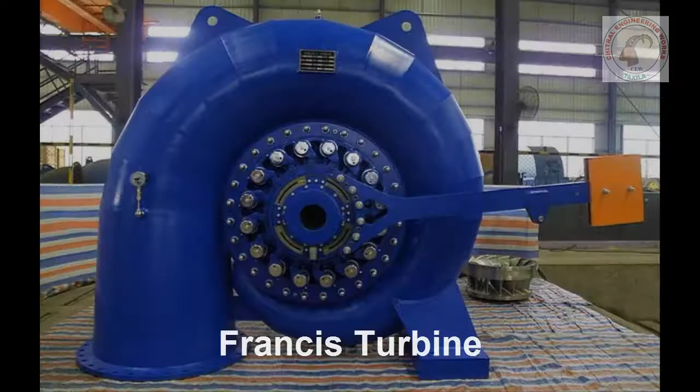Before heading towards T34, it is very important to know the history of the original Francis turbine. Initially, this turbine was invented by Mr. Jean Victor of United States in 1820s. And then the turbine was remodified by Mr. S.B. Howd in 1838. 10 years later from S.B. Howd's development, the turbine was finally developed by Mr. James B. Francis and called Francis reaction turbine. The Francis reaction turbine was considered to be a highly efficient turbine.

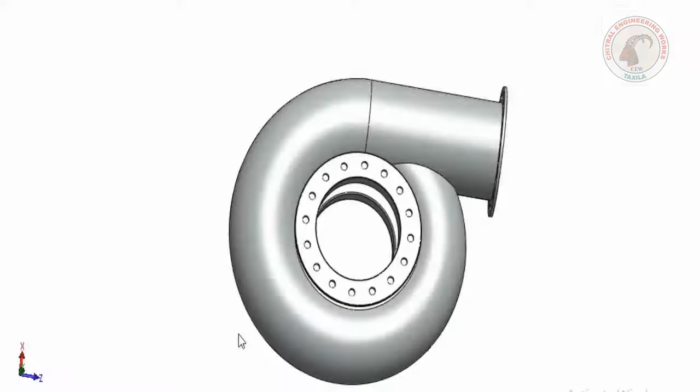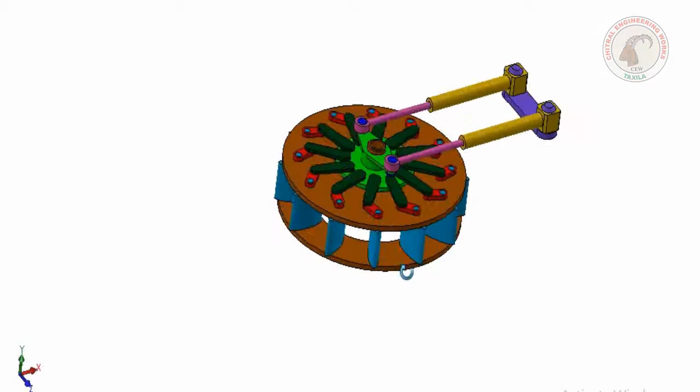But there were few difficulties in manufacturing this turbine. First of all, its spiral casing itself is very difficult and time consuming to manufacture, and of course it's expensive too. Another big problem is to repair and maintain its complicated wicket gate assembly in the remote areas where mechanical workshops are very far away from the powerhouses.

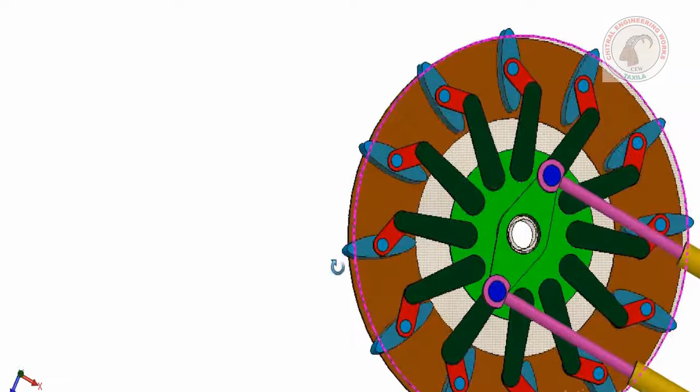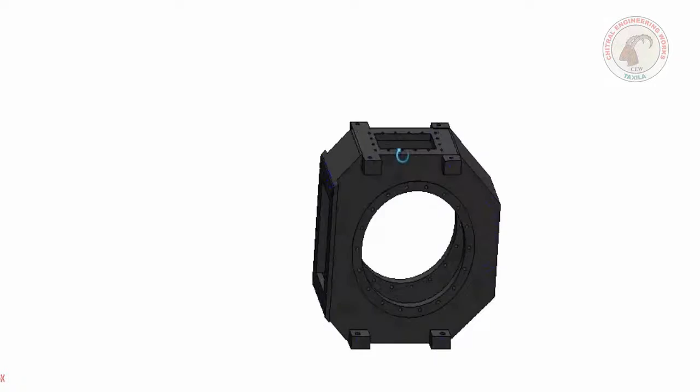To overcome these problems, Mr. Akhtar Chaudhary of Chitral Engineering Works, Taxila, Pakistan, started development of Francis reaction turbine by replacing its spiral casing with square casing, and instead of using complicated wicket gate assembly, he used fixed wicket gates and only one cross pilot to control water flow. In 2008, he succeeded to achieve 88% efficiency and named this development as T34 cross pilot reaction turbine.

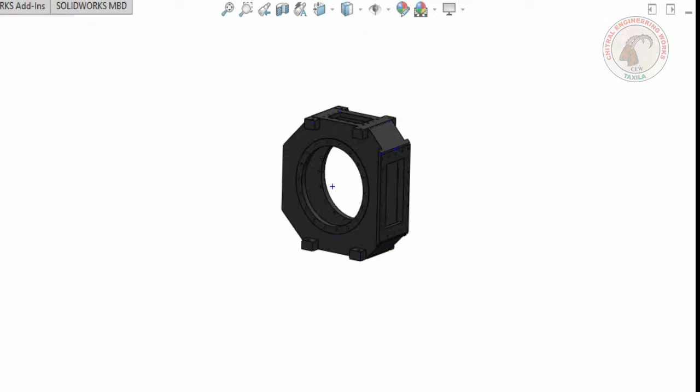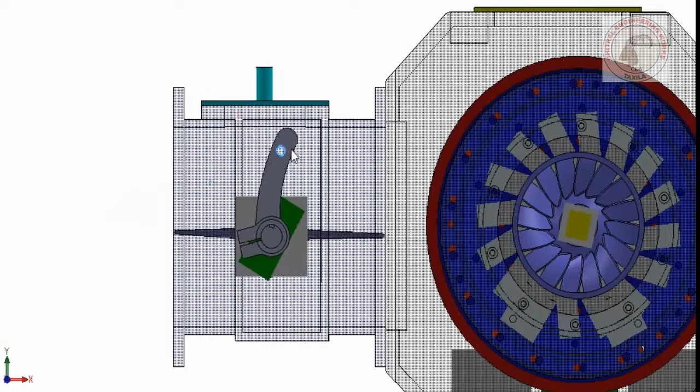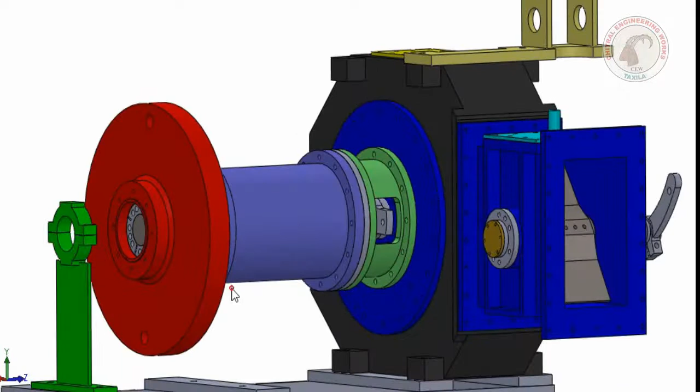This is the intake adapter, and inside the intake adapter there is a butterfly valve to control the water flow. When water passes through cross pilot and strikes the runner, it rotates in this way. The runner is coupled with the flywheel by means of this shaft. Flywheel is further aligned with generator by a universal cross shaft in a single line.

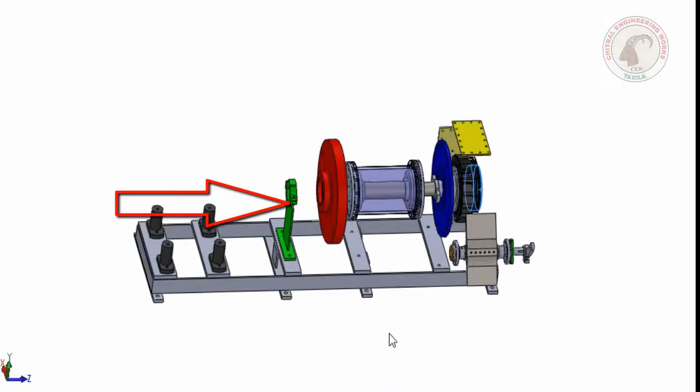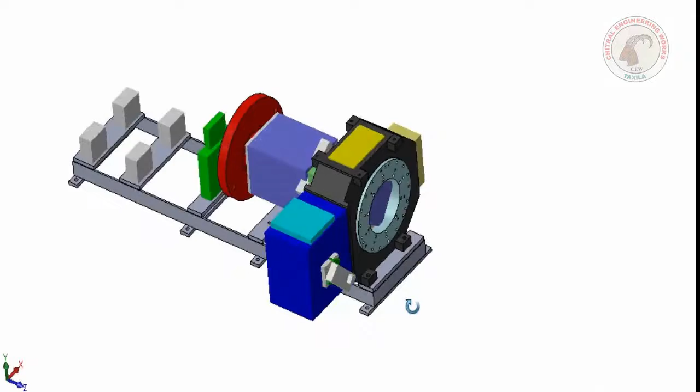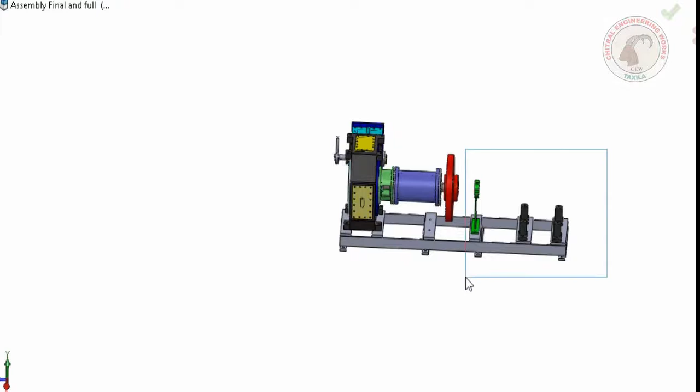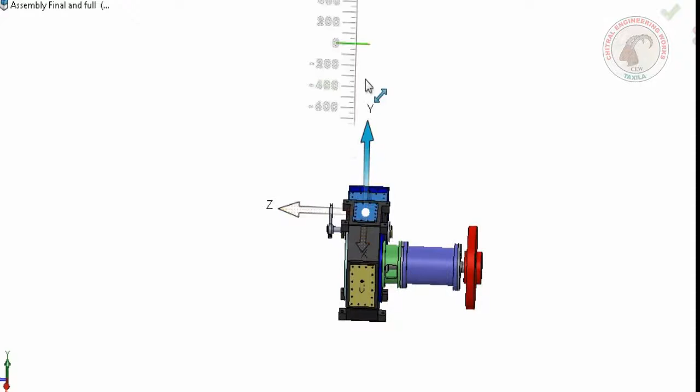These metal plates on the top of casing and intake adapter are used to remove trash. This metal plate on the back side of casing is also used to remove trash. This is the base frame of turbine. Metal plates for removing trash. Metal plates for removing trash on the back side of casing.

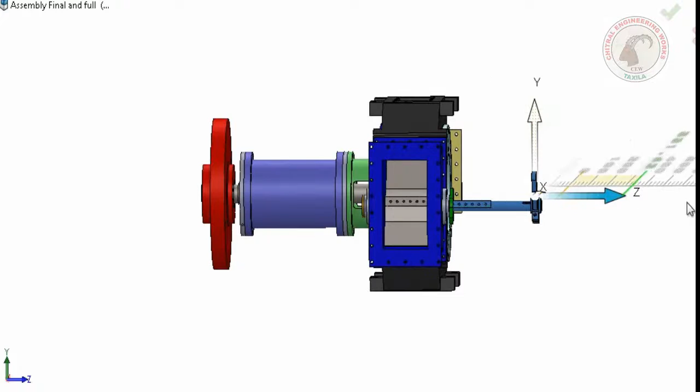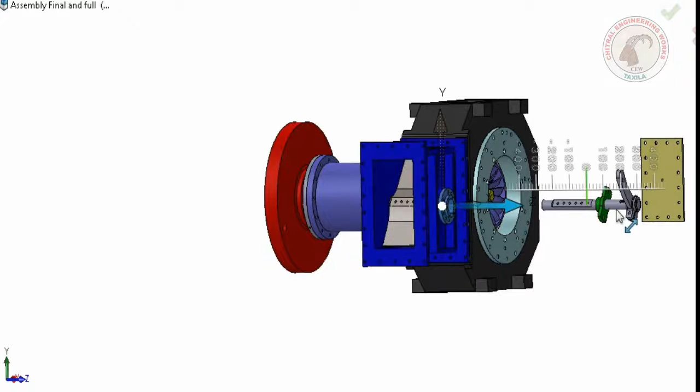Shaft and lever for butterfly valve. This part is used to stop the leakage of water. Bush for this shaft. Same bush for the other side of this shaft.

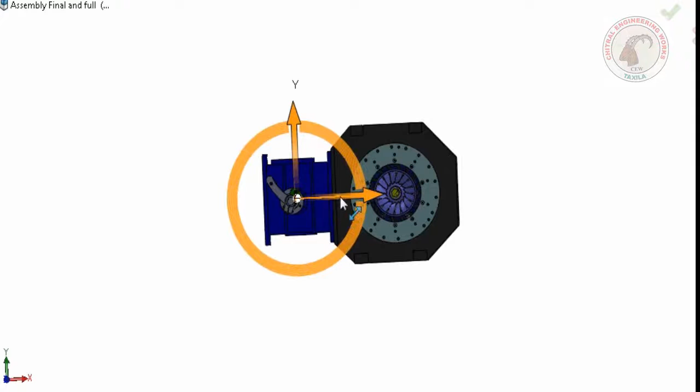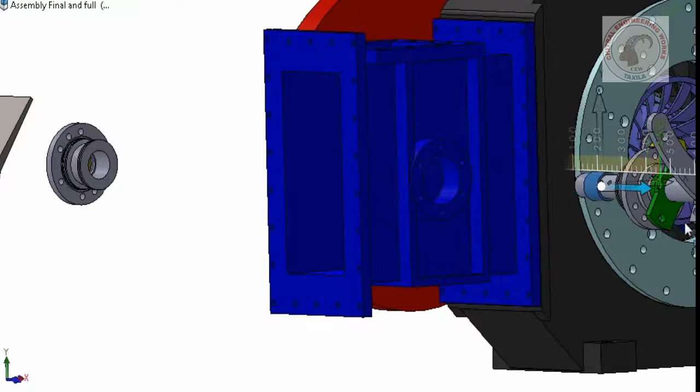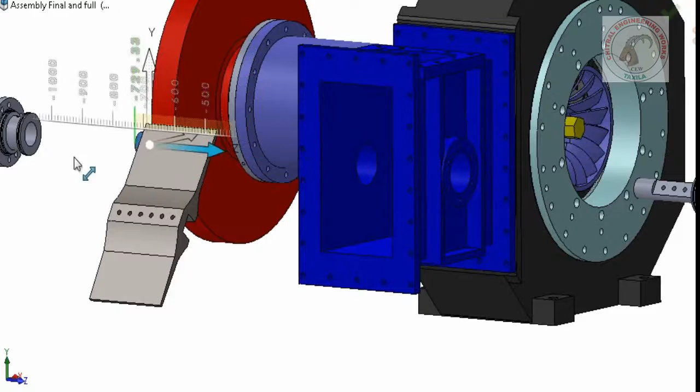Butterfly valve. Brass bush for increasing the life of butterfly valve shaft. Intake adapter.

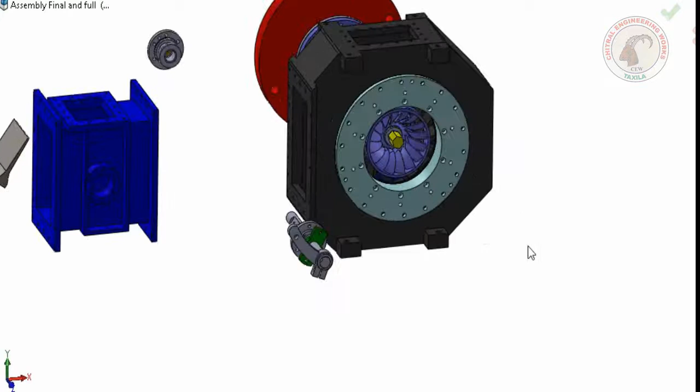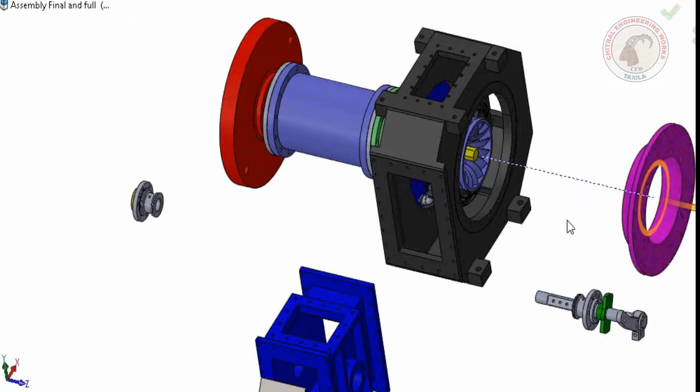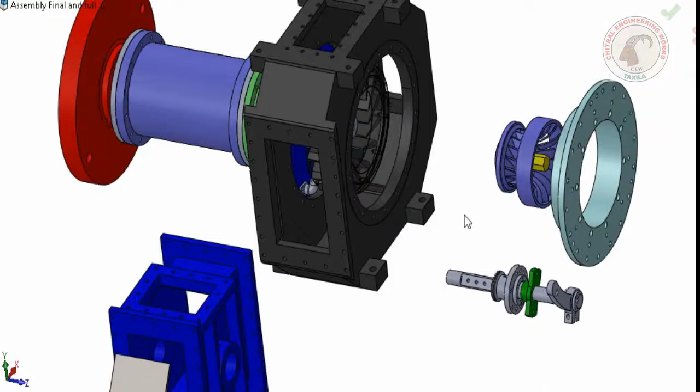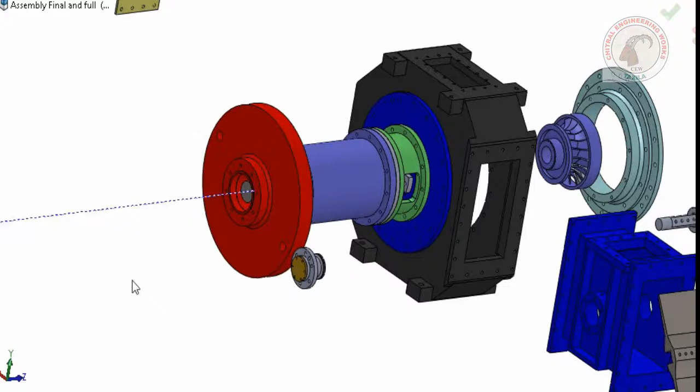Discharge tube ring. Runner. Collet catcher for flywheel. Flywheel.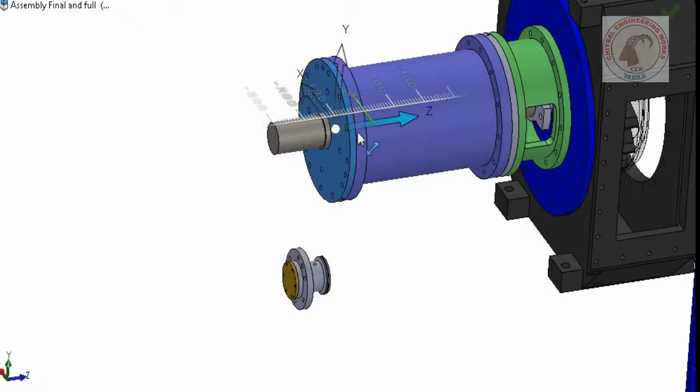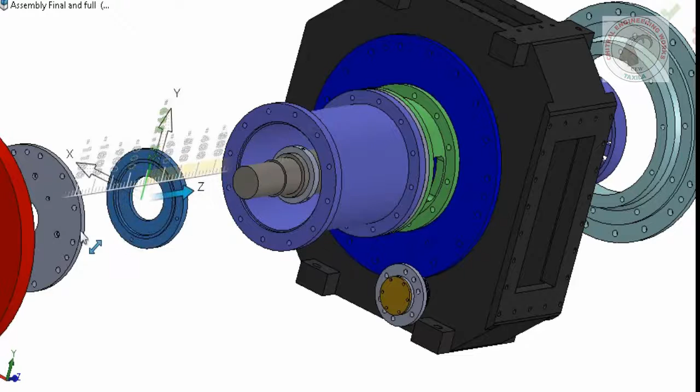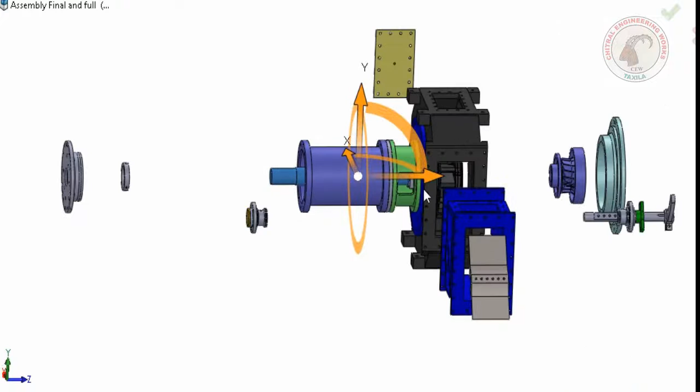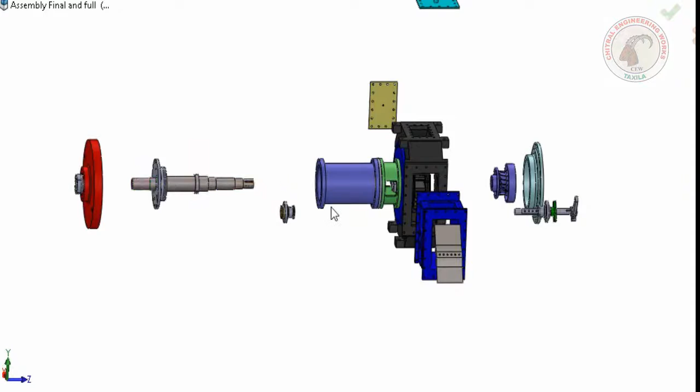Bearing and bearing container. Grease cup for bearing container. Stopper for grease cup. Main shaft. Bearing housing.

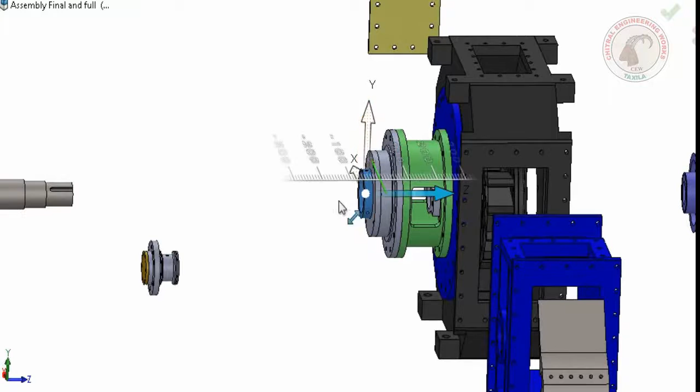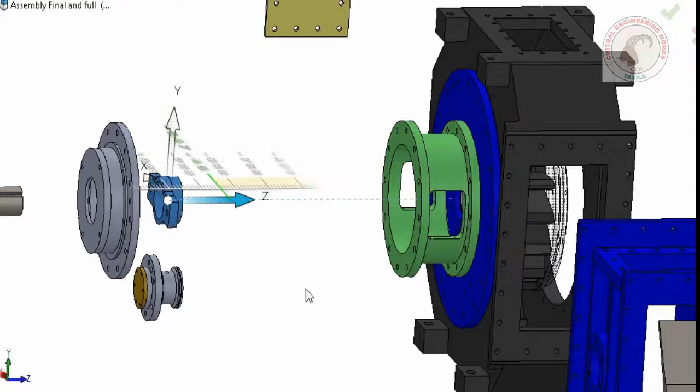Grease cup stopper for the other side. Bearing container set. This part between the casing and bearing housing plays a very important role in increasing the life of bearing by diverting the way of extra water before entering into the bearing housing.

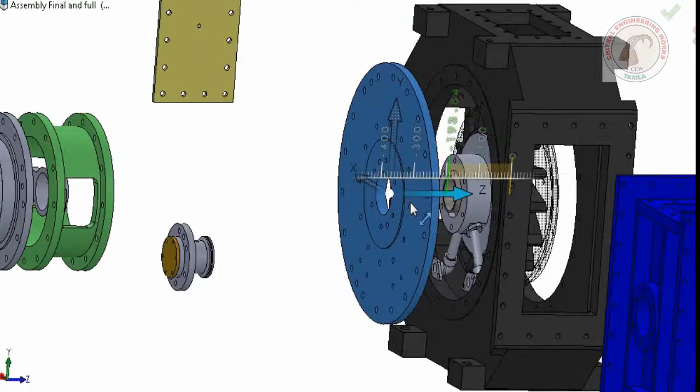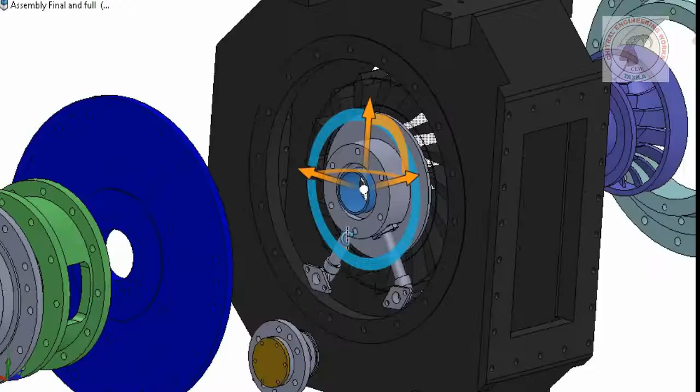Side disc of a casing. Stainless steel bush to increase the life of main shaft. This is a drainer and also used to divert the path of extra water by these brass pipes.

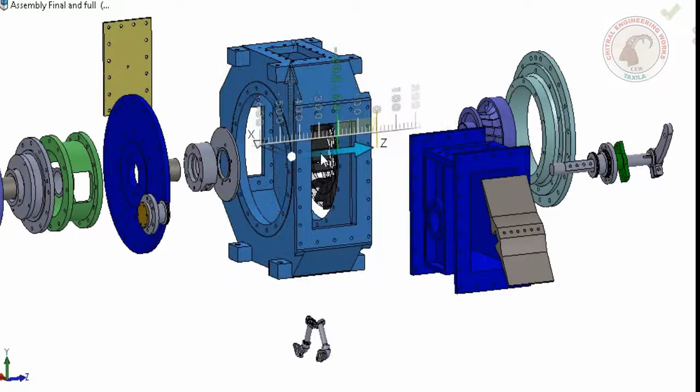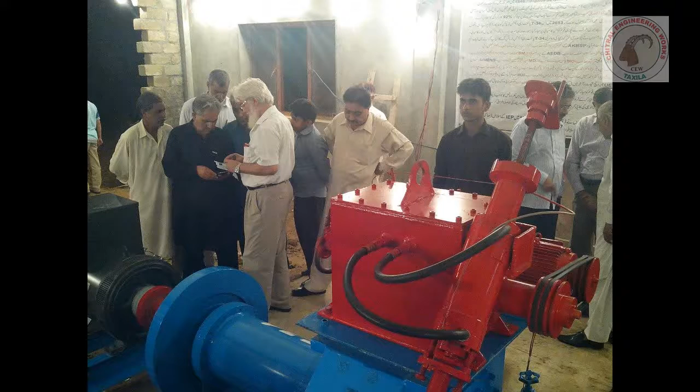And the casing. In 2013, this turbine was practically implemented at Khanpur Dam for testing purposes.

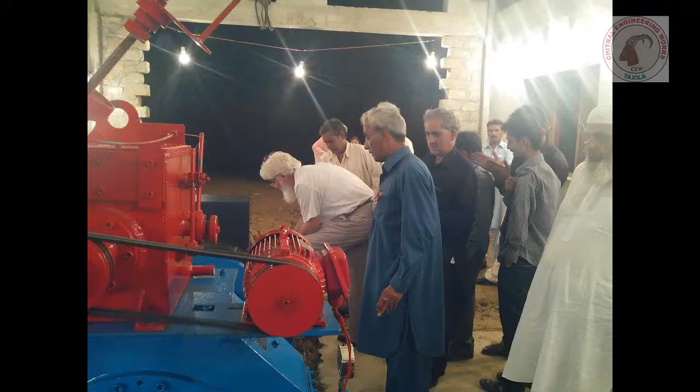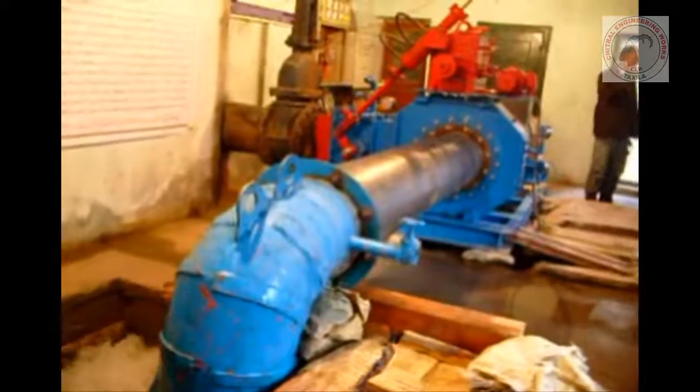After the successful testing of this turbine at Khanpur Dam, the first credit directly goes to the local community of Garam Chashma, district Chitral, for giving us a chance to practically implement our T34 in their community area. And second credit goes to SRSP Swat for trusting us and giving us a chance to prove our ability, for which we are really thankful to SRSP.

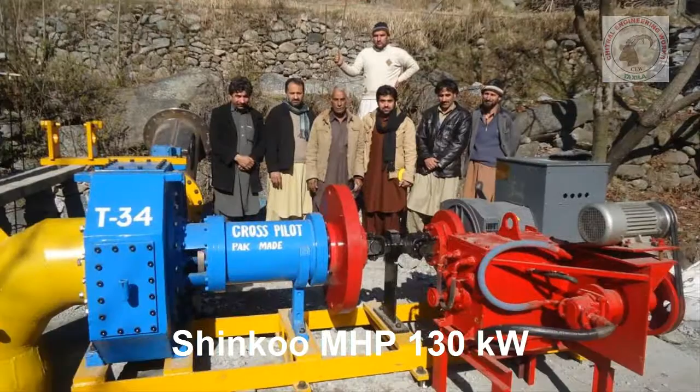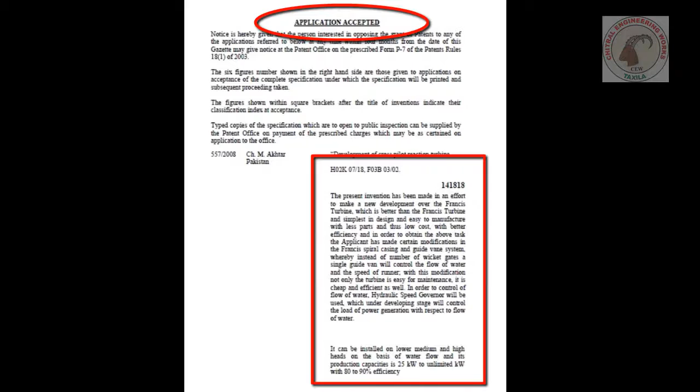In 2008, an application was sent to the IPO Pakistan by Mr. Akhtar Chaudhary regarding the patents of T34 cross-pilot reaction turbine. The application was accepted and published in the Gazette of Pakistan in 2013 and titled as T34 Cross Pilot Reaction over the Francis Reaction Turbine. And the final patent certificate was received by Mr. Akhtar Chaudhary in 2014.

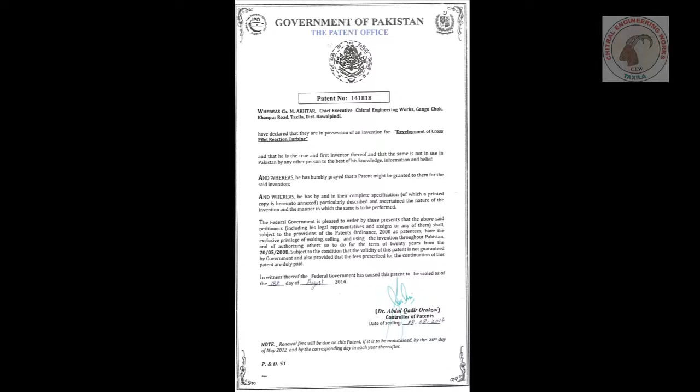Based on these achievements, Mr. Akhtar Chaudhary was awarded first gold medal from UET Taxila and the second gold medal from UET Peshawar.